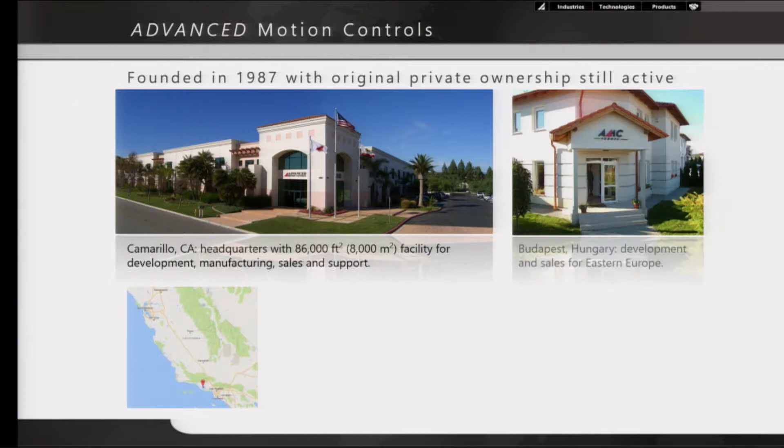I'm only going to do a few slides. Just want to give you a basic overview, because the technical portion of this presentation is going to deal with robotics, which is the primary subject here. However, many of you may not know AMC. So AMC is Advanced Motion Controls, and our home base is headquartered. We're vertically integrated, and we do everything out of our facility in Camarillo, California.

Now, most people say, well, where is Camarillo, California? So the logical response is, say, 45 minutes either way in between Santa Barbara and LAX or downtown LA. And they go, oh, okay, I have a pretty good idea. But another way to say it is 2.5 hours from wine country in Paso Robles, or right up the block from the institution Ale House. And then they like that location as well. So we house everybody and all of our product in an 86,000 square foot facility.

And it's a co-owned company, so we're privately owned, co-owned by Daniel Schoniewald, and he pretty much runs the entire operation in Camarillo. And his partner, Shandor Barta, operates out of our Budapest, Hungary facility, where we do advanced machine controls and additional servo drive sales.

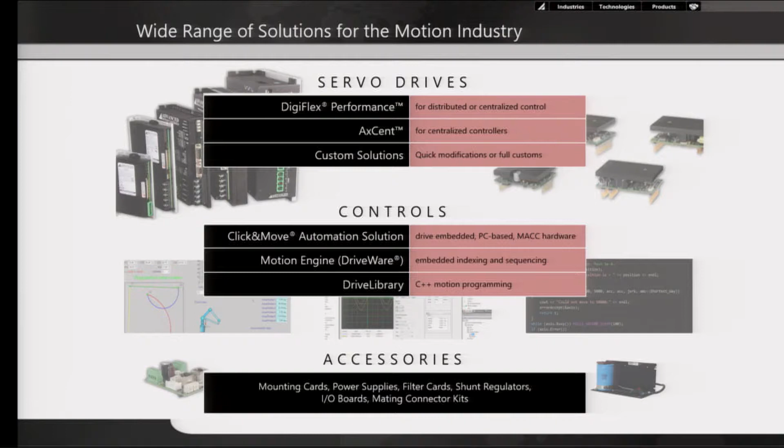We also provide mounting cards, power supplies, so we'll handle the AC to DC. We can put in our plug-in drives. We can add power factor correction technology. We can boost up the signal. We're very capable.

We also promote ourselves as being everything to everybody. So when you go onto our website, we have a third party, like joint venture, third party collaborative. And many of the other presenters that are here today are also listed in that part of it. So we work very closely with many motor manufacturers, many feedback devices. It's pretty much any network, any controller, any environment. We provide the solution working, and we keep ourselves very flexible to work with companies.

So some of the things we can do is the products, as I said, could be packaged AC to DC, or they can be plug-in solutions. We can put servo drive axes together on one board. We can embed these drives inside of motors. Some of them go into robotic joints, so they're very diversified. Okay.

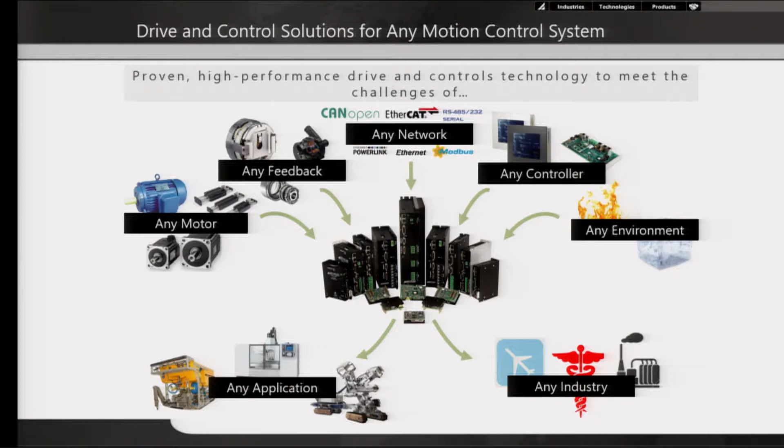So just to list a few of the networks that we are working with, that would be Modbus TCP/IP, EtherCAT, POWERLINK, CANopen. We actually still support SynqNet, all the serial, and we work with various controllers, various actuators, various other technologies.

As I had mentioned, just to give you a flavor of all of our products that we manufacture, 33% are custom. And custom in the sense that if I have a regular servo drive and you tell me your robot is going to be working inside of a refrigeration, we would say, hey, go to our extended environment drive, and we could support that. However, if the volume is so critical and the cost is so critical, what AMC will do, which is different than most companies, AMC will say, okay, let's just change some of the components that are going to operate at that temperature.

It's pennies on the dollar, a couple of bucks NRE, and then we're off to the races, and you're only paying for that part of the design that you need to operate. So you didn't get the whole full military, the full extended environment features. Only the features you need are the ones that we're going to supply you with and keep you as cost effective for your volumes as possible.

This here is the custom 3-axis EtherCAT solution that we do for Philips, and these are all representations of the customization that we do. So the first kind, where there's no PC board change, it's 33%. The second kind, which is also 33%, is from a clean sheet of paper, and that's where we're at.

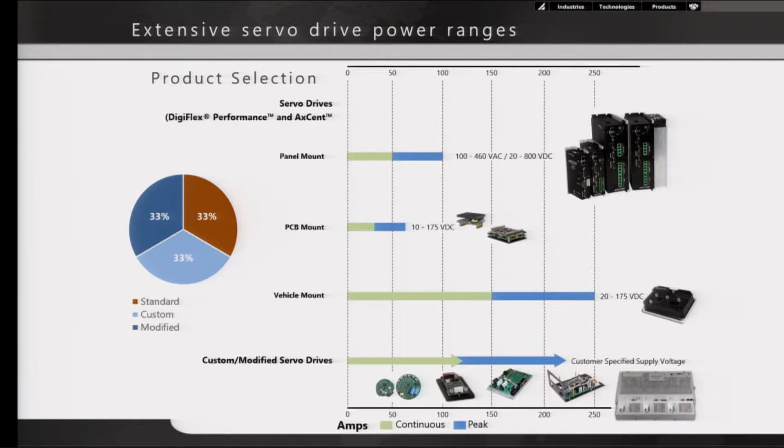We constantly keep our doors open to all of you. So anytime you're on the West Coast and you want to go with your families to Disneyland, feel free to come visit the factory.

As I mentioned from the very get-go, we've got 30 years experience in electromechanical design and 30 years experience with respect to firmware knowledge and application. And we're always looking forward to becoming more understanding of our customers so they can see how we operate. And essentially, we become an extension of your group. Here are some of the certifications: CE, UL, ULC, RoHS compliant, REACH, ITAR, and we're an ISO 9001 organization.

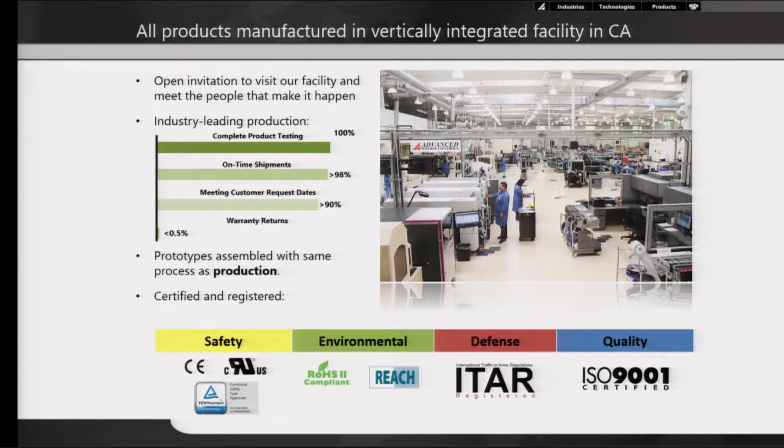Our initiative has always been, we don't want to be the biggest, we just want to be the best. And that best is essentially extending ourselves to supporting our customers. And that is critical when you're working on projects and you run into some technicalities. Sometimes we get calls in, and 30% of the calls have nothing to do with our servo drive. It's the interaction of how the servo drive is operating in the system, but we don't care. We're going to work with you through whatever your issues are, and we're going to come back and get you responses regardless. And that's all part of the AMC team.

And some of the things that we do, if you're hearing noise, or let's say, for example, you're using a Maxon motor, and this is the perfect motor for the robot, but it's got such a low inductance, then rather than say, oh, but the standard doesn't do the inductance, we said just send the motor over. AMC is going to run the drive with the motor. We're going to change some parts to optimize the current loop tuning, and then we're going to send it out, and now it works. That's the type of service that we just give normally to all of our customers, making sure that you've got the proper performance.

And we work worldwide through reps and distributorship. Like I said, Electromate has been doing a great job for us for over 23 years. I've been working with them for 23 years, so it's probably more. So that's the final lab snapshot here. Any motor, very universally applied.

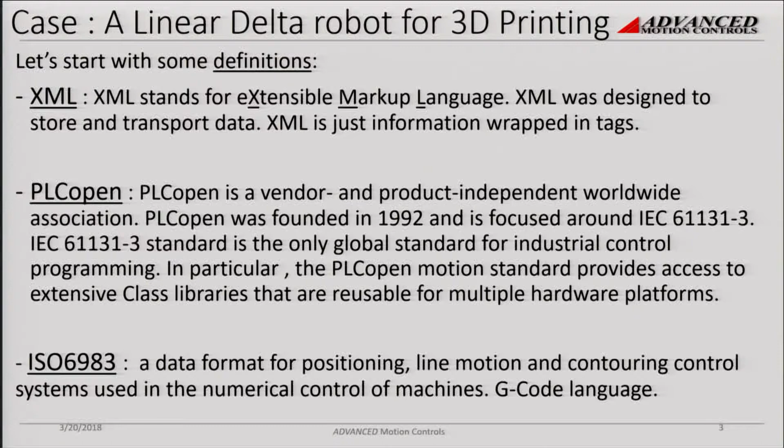Lastly, ISO 6983, all it is, for those of you who are involved in numeric control, CNC machining, it's G-code language. That's all it is. Some more definitions to finish up. A linear delta robot. Basically all it is, it's a parallel robot manipulator in which you have 3 sliding joints. It's not a serial articulated robot, and you'll see an example of it here shortly, with each one of those joints having 1 degree of freedom, and they move separate arms, meaning they translate them linearly, and they connect to a single plate at the bottom.

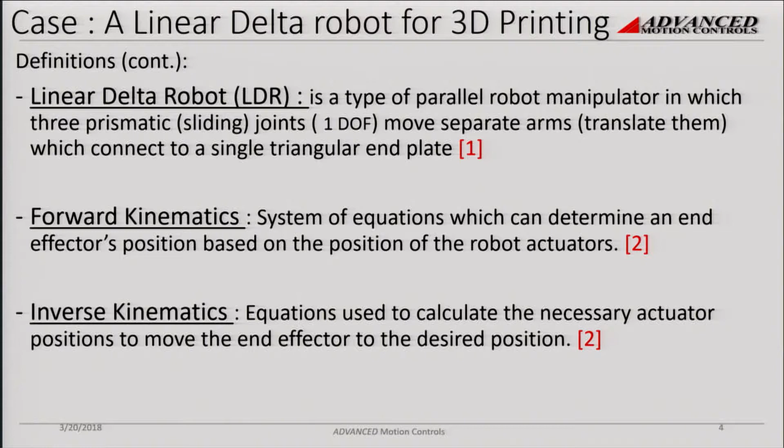2 other definitions really quickly. Forward kinematics. All it is, once again, a system of equations which you use to determine the end effector's position of that robot based on the position of the actuators. Inverse kinematics, instead, are equations used to calculate the necessary actuator positions to move the end effector to the desired position. One set of equations comes at it from this way, the other comes at it just the opposite.

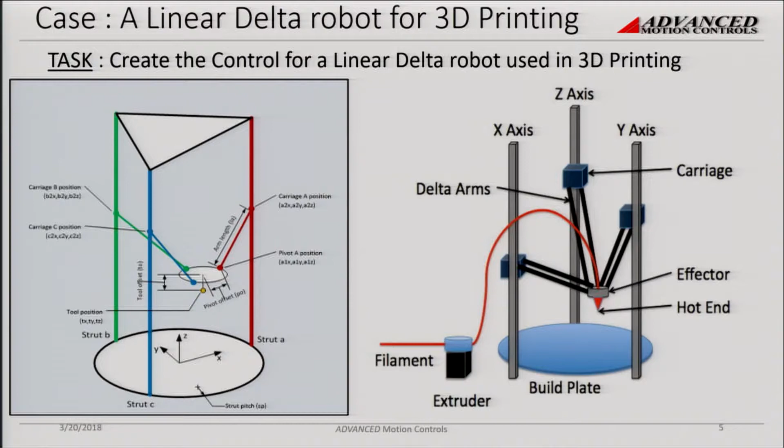Okay, so what are the challenges and the constraints? What are we up against? You're supposed to be using standard tools to solve that problem, a real world problem, create a 3D printer. So what are we up against? Well, we were told you have to use PLCopen function block class libraries to configure and create the control logic. It has to be the heart and soul of the control logic.

Second of all, and this is key, it opens the door to everything. I don't care if you have a SCARA robot, an HBot, an articulated robot arm, I don't care. The process and the software tools are the exact same. And if you have anything in that process where you're controlling the robot that's peculiar, maybe you have some algorithm, maybe you have to sync with a slight offset the extruder position related to the vector velocity. I don't care. If you can describe it and you can create an algorithm around that, you can use it.

Because the other challenge we had, and we were lucky, PLCopen states, not only do you get our function block class libraries, but we have a rule. And what does the rule say? The rule says, open up an empty function block, give it a name, stuff your C++ code on it, save it in the library, it's there forevermore. And that's what that second line does. It allows for custom C++ code to be used and embedded in the control logic as needed, which means all of a sudden now the sky's the limit. All of a sudden now we create a graphical object, the function block. It can have anything we want in there.

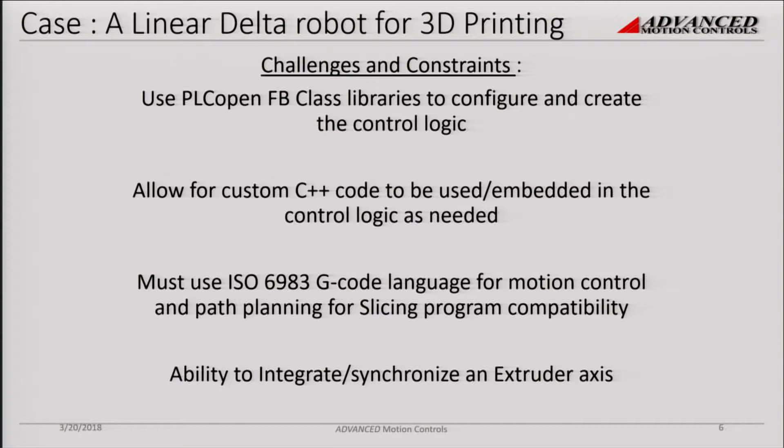We also had to use G-code. Well, why G-code? What was so special about G-code? Well, this control architecture happened to move into the arena of robotics. It also happened to move into the arena where robotics were used in conjunction with other control scenarios, both discrete manufacturing and process control, and G-codes in those particular industries were used quite a bit. In our case, for those of you who know anything about 3D printing, whether you're going to be printing from plastics, plastic amalgams, or even powdered metal, for instance, slicing programs spit out G-codes. So if you can't manipulate G-code file, you're not going to be able to control the process. And then finally here, we were up against the ability to synchronize and integrate an extruder axis.

So what's the solution? How do we do this based on the tasks that were in front of us? Well, we created a graphical programming environment with a logic schematic editor. You're going to see a piece of that here shortly. We use standard PLCopen function blocks to create the logic for the different states and the kinematics. We created XML files, and we made them available through this integrated development environment, which you're going to see a piece of also. And then we created a user-defined function block to handle the Delta robot kinematics, and we stored it in our common library now.

So what does that mean? As I said before, we encapsulate C++ code in that user-defined function block. It's in robot handling library. So are the kinematics for a SCARA robot, as I said. Articulated robot, 6 degrees of freedom. How many of you have watched a soccer game and or the Super Bowl? I would hazard a guess probably everyone in here at one time or another. And if you've seen, unless they screw up somehow, the camera actually follows the action on the field, whether it's a soccer stadium in Europe or Asia or the Super Bowl in the United States. Well, how do they do that? There's a company called Cable Cam. It's a glorified robot, 6 degrees of freedom. They've got these big drums, rotary axes, controlling the position of the camera. Similar to the Delta robot. We have a kinematic model for that because we're the ones that did that.

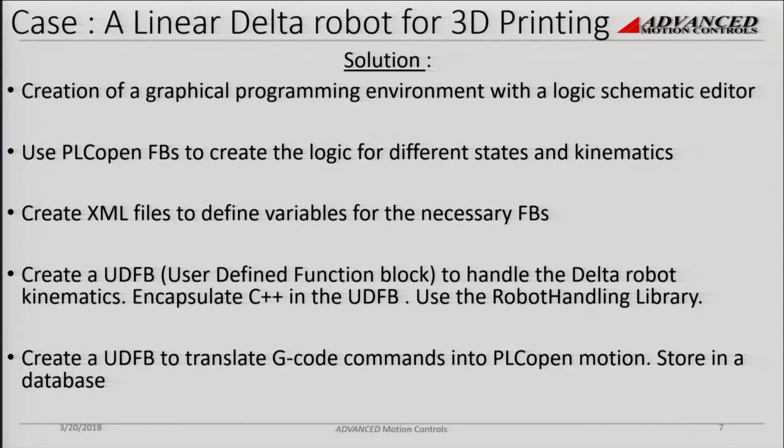And then finally, we had to create a user-defined function block to translate the G-code commands into PLCopen motion, and we had to store them in a database. For all intents and purposes, what does that last line mean? It means we had to come up with a G-code translator. Once it's done, it's there forevermore. It's called a motion task. It's available to anyone who takes advantage of it.

Let's drill down even more now. Let's take a look. I said that we created function block diagrams. For time's sake, we cannot look at every one of those function block diagrams in this project. But what I will say is this. Importantly, the one highlighted in yellow, called main, is the heart and soul of any project in our development environment. What it does is it pulls together any of the sub-schematics or any of the adjunct schematics, and it says, okay, you should be able to print that out, take a look at it, and you should be able to pull somebody off the street and look at that because it's self-documenting and it's graphical.

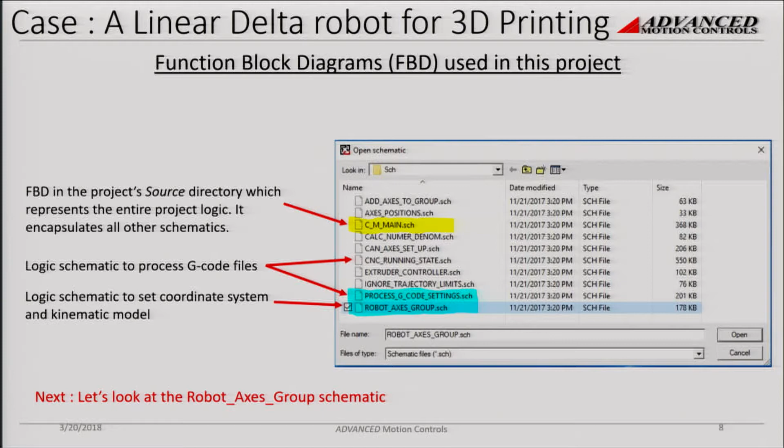It's the heart and soul of the development environment. But the ones for this presentation that we want to talk about are the running state, process G-code settings, and the robotics axis group. That's the heart and soul of the robotics and the kinematics for this presentation anyway. So let's take a look now at that robot axis group schematic. There it is right there.

I can print this out and I can give it to you, and I will guarantee you after the next slide, you're going to have a pretty good idea of what's going on there. What you won't see, you're going to see a snippet of it for one, but behind every one of those function blocks is standard C++ code. You don't have to know C++ unless you want to write your own function blocks.

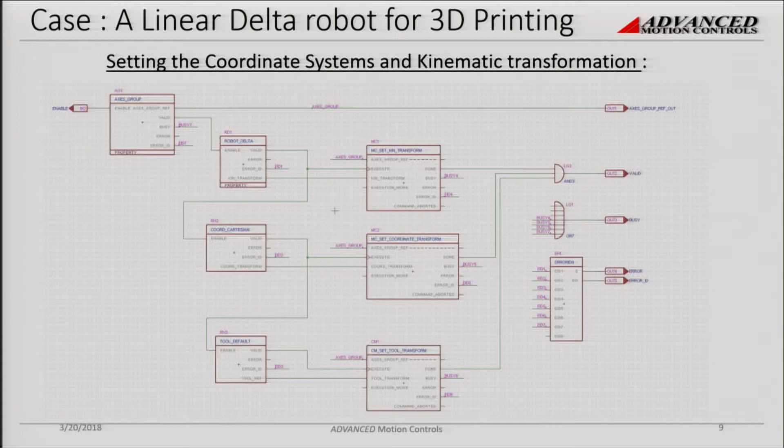So what have we done? We've encapsulated the C++ code in the function blocks, and we can compile all of this for the hardware platform you're going to run on. We're going to run on this Windows 10 system. So let's take a deeper look now. Let's drill down even more. Let's find out what essentially that left side of the schematic does. Because those three function blocks, top to bottom, are the heart and soul of the project. And that's what it does right there.

The one in the upper left corner called axis group reference, what does it do? It sets up what the axes are. It groups the axes and says, here's my group, X, Y, Z, A, B, C, with an extruder axis. It depends on your coordinate system. You'll notice under properties, there is a small little strip on the bottom of that function block that represents an XML file. Every time you see a property moniker on that function block, it means that it's getting its characteristics from an XML file somewhere.

Oh, and by the way, when all of these schematics are created, we automatically create the XML files for you. You get to poke those values there, but you don't have to go on your own and create the XML files. So, as it says there, that robot delta function block generates the kinematic transformations between the axis coordinate system and the machine coordinate system. Inside of it, we're going to see it on the next slide, is the actual C++ code, or some of it, that actually handles the algorithm for the kinematics.

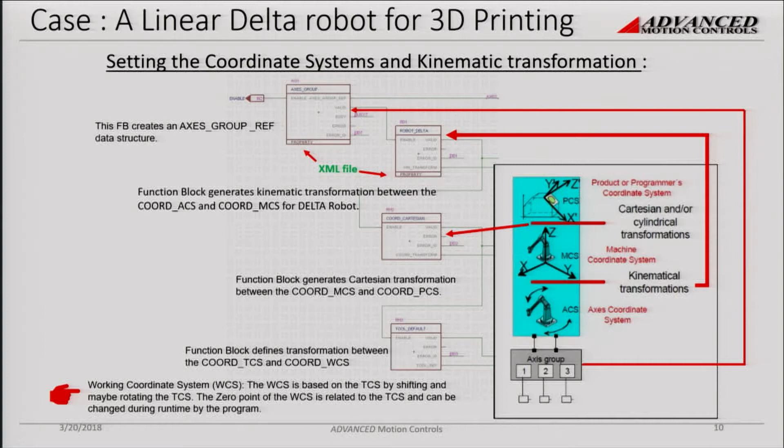And then lastly, in this case, when we actually have the extruder nozzle on it, in our example it doesn't exist, but we go a step further and we say the tool coordinate system now gets changed into the working coordinate system. Axis group, coordinate system, machine coordinate system, transformations, and then here, how do these relate to each other? Pretty straightforward for all robotics. Doesn't really matter. You have to go through that process for any robot system you control.

Okay, I mentioned in the prior slide that there are XML files that are used to configure what code is in that function block. This is an example of the delta kinematic function block, and you're seeing two views of it. In our development environment, we put a nice wrapper around it, pull down menus, and make it easy for people to use it. We also provide, once it's generated, the XML file, which you can open up. In this case, it was opened up in Microsoft Visual Studio.

Okay, let's drill down even more. Let's look at the function block, the heart and soul. I told you it was C++ code.

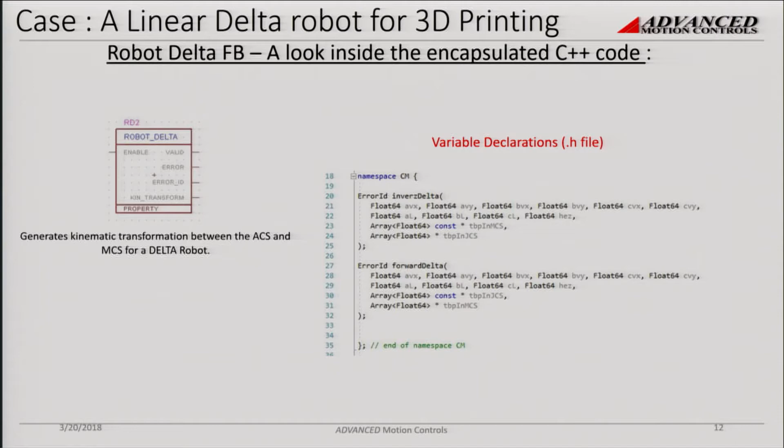Very first thing you're going to find, for those of you who program in C++, are the contents of a header file. It's just variable declarations for the parameters to handle the calculations. And then finally, because I couldn't expand it out and make sure everyone would see it, would be the C++ file, the actual source code that gets compiled. And you'll see a snippet of both the inverse kinematics and the forward delta kinematics.

If you program in C and you've done lower level C++ code development, this can be attractive. As I said, there may be some things that are very particular for what you're working on. Maybe not. We don't have time to discuss it, but I would hazard a guess that most of what you've had done, if you're working in robot kinematics, robot coordinate systems, we've done already, and they already exist either in our library or the PLCopen library.

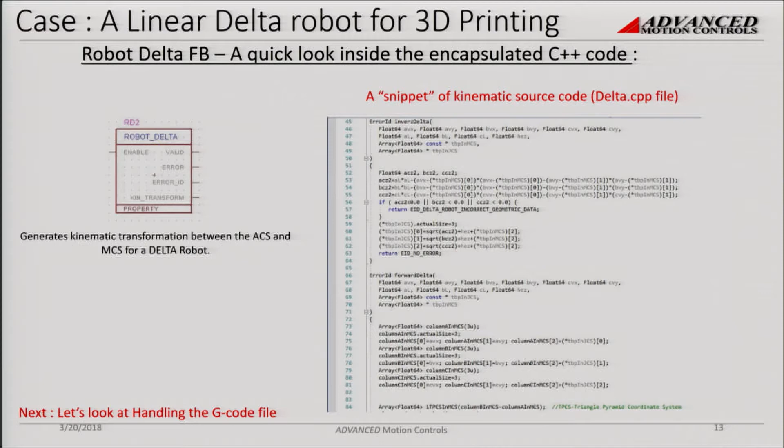Okay, now let's take a look. What about G-codes? So all of a sudden now we've created a model. We understand physically what we're up against. Where do we go? What moves the end effector around? The G-code file. How do we handle the G-code file? It just doesn't magically get changed into motion. So there is a G-code file, a .nc file, which generally is created by a slicer program for 3D printing or a CAD/CAM program in the standard discrete manufacturing world.

So that G-code file has properties. Initial register settings, how many axes, any constraints on the axes. That's brought into another block. So we take the settings from the XML file and we process them. We process the G-code file. Here's our G-code converter. Once again, you don't have to do it. It's done for you. It takes that G-code line by line and it converts it into a generic text database. And it makes it available to you. That file, once it's converted, is there. And you'll actually see it on the little operator interface we're going to bring there.

Once this is generated, that motion task, this file gets fed into what's called the CNC running state. That's a whole other schematic. Don't have time to go into it. Can certainly send you this project and all the details of it. That gets executed line by line at the speed of the hardware platform that it's running on to actually run the path that either the CAD/CAM or the slicing program for this Delta robot arm has created.

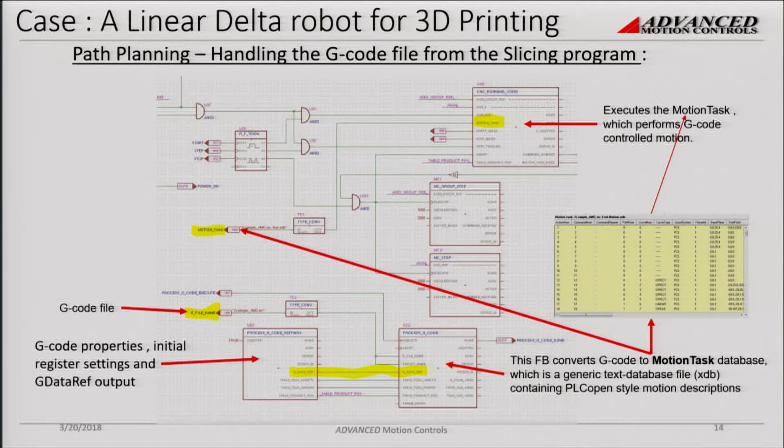In this case, the G-code handling function block also has an XML file, very similar. In our little wrapper, in our IDE, we talk about what type of motion is it? Do you support arcs? Is it a bunch of line segments? What are the axes that are set up? And this is kind of a raw look at that same thing in Microsoft Visual Studio.

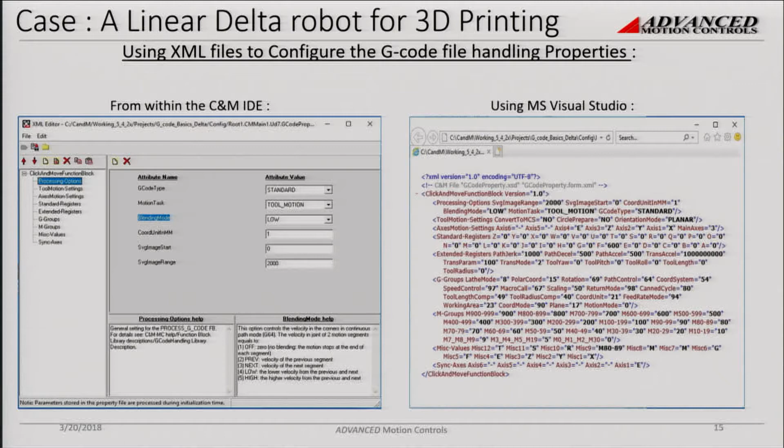Along with our schematic editor is an integrated operator interface that's built in. So one thing that you'll see is a representation, a 3D representation. You're going to actually see this running here shortly. And then the G-code file that you can load, and then the database, this motion task that translated the G-code file into PLCopen line-by-line statements.

And by the way, you'd say, well, what if I have an M code? For those of you who know G-code, I want to go off and do something special I created on my own. We don't care. Describe to us what it is. We'll incorporate it into the XML file. It's there forevermore.

And this doesn't have to be post-processed. Because some of you may be thinking, whoa, wait a minute, he just said that this gets translated into PLCopen motion commands, and I could run it on this box, I could run it on a Raspberry Pi, I could run it on what I wanted to. The answer is yes, that's correct. Because we give you the compiler to do that. And we have a variety of compilers for the hardware platform that you want to run on.

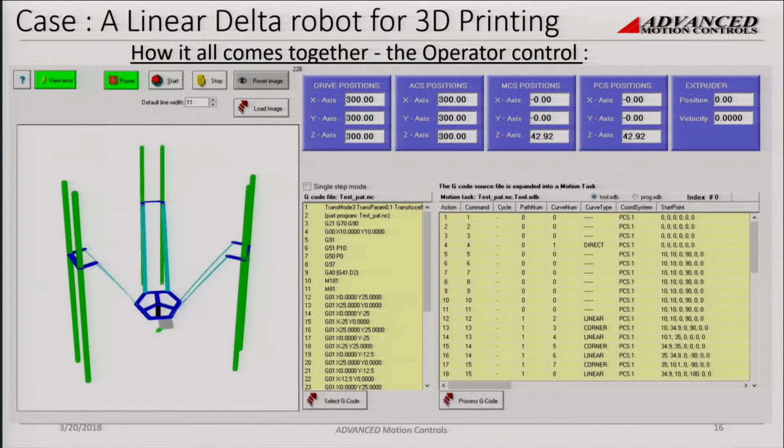Okay, let's take a look at this project. Let's actually run it. I'm going to back out of this. Just bear with me. You'll see some axes come up.

Trying to get this projected. I may have been trying to run that on that, but do I need to kill it? Okay. Hopefully you can see that. That's not too blurred.

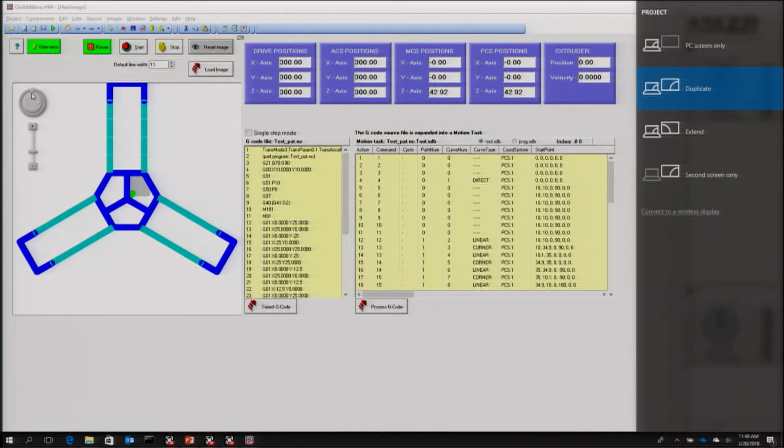Same screen, but now it's actually controlling a 3D printer based on the project that we had. So let me give you a different view of that. So we're going to move this through a slightly different angle. Okay. So if this was connected to a real machine, and by the way, everything you're seeing here, the only difference is the XML file.

The XML file, and unfortunately, I apologize, you can't see the two other axes here. The XML file says, oh, these are virtual axes. They're executable files for the purpose of this presentation. If you go in, and I can show you where it is, you poke the XML file and say, oh no, I want to use 3 CANopen axes, or I want to use 3 EtherCAT, or 4 EtherCAT, or 6 EtherCAT axes. You describe what they are, and instead of running it on the screen, if we had the hardware in front of us, we could run the actual machine.

That's the only difference between running it here and running it on a real piece of hardware, on a discrete machine. Code doesn't change other than that. So what would I be doing now? Well, I hit power. In our case, it enables the axes. If I was hooked up to a real piece of equipment, I'd be enabling the servo drives. So now I'm going to tell it to start. And you'll see it running through. Unfortunately, I apologize. The other 2 axes aren't here.

You'll see the actual drive position on the servo drives, the axis coordinate systems, the machine coordinate systems, and the product coordinate systems. It runs down line by line at the same time that it's already pre-processed this, and it's showing you the corresponding ones. The velocity of this process can be handled 2 ways. You can hard code it, velocity, acceleration, deceleration. If you're using a G-code file, generally the slicing program handles all that, sets a feed rate with an F value and some M values. And it's going to finish. The only thing for the purposes of this presentation that you won't see is the extruder.